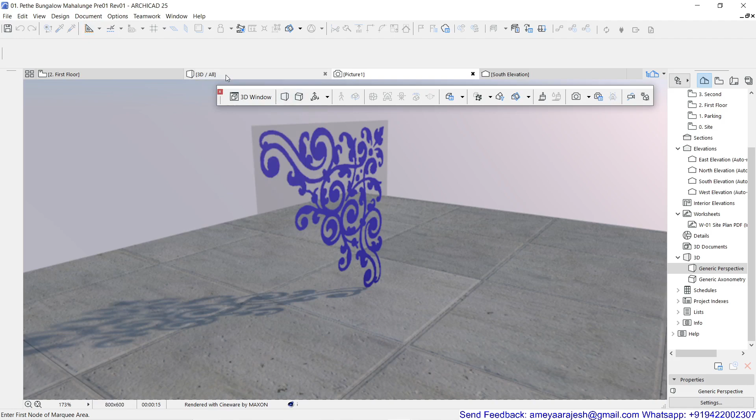For this, I'm having this image with me, so you can take any such image in a black and white format, and then open that in Photoshop. After that, our target is we would like to fill this up with some particular color.

So go inside Select, and you can say Color Range. We are first of all targeting with this picker tool, and we're just going to pick this white color area. By default it will get selected, so all the white area will get selected.

You'll say why not black? It's easier to select white and then invert to black in this image, so I'm doing that. I'll do the inverse for the selection now.

So all the black area is now selected, and then I'm going to add one new layer. I'll switch off the earlier layer, so now this is the current layer. You can select any color as per your choice, use the bucket tool, and try to fill up this area.

Once this is filled, don't deselect the selection area, let it be. Now let's add the alpha channel.

So switch to the Channels tab. Here you can see New Layer and New Channel, and that will become by default alpha. Now here, alpha can only be in black and white normally.

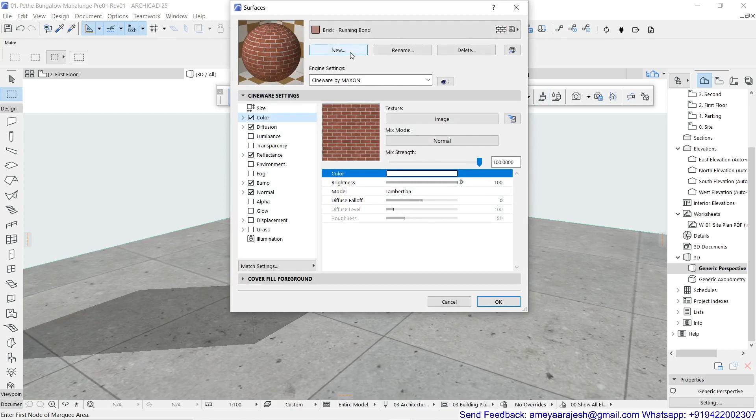Now in ArchiCAD you should start with a surface. You can see New Surface, which I'm going to make a duplicate of any plain surface I've selected. I'll just try to rename this as surface alpha.

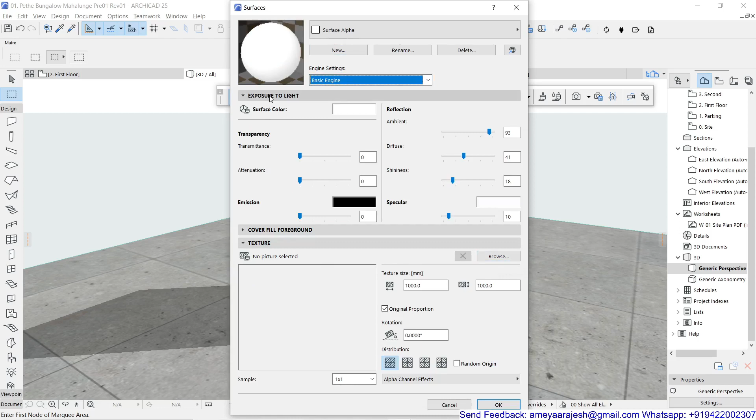Here in the basic engine you have to just go inside the texture rollout, and there you can go for browse, and you can just add that image which you recently developed. So make sure that your image is there now with you.

Say OK. Now you can see the reflection of that selected pattern — check the proportion and everything, you have to match it. Now in the alpha channel effect, you just have to make sure to use the transparency, and just click outside. You will see now the effect is activated for the alpha channel.

A similar setting you should try to apply in the Cineware also. So I'm clicking on Cineware, and here I can see Match Setting, Update Cineware Setting from Basic. Now you can see the correct reflection of this alpha channel along with the main image. Just say OK for this.

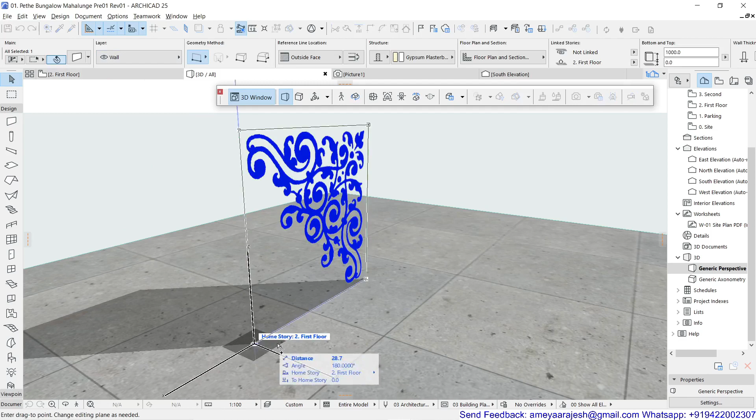The surface is ready. What I have done — this is the wall actually, and this wall I'm just going to copy for you again. Now remember, the wall which I have used is actually with 0 thickness.

You can decide as per your choice, and I have used this as 1 meter by 1 meter. Now when you apply this new surface...

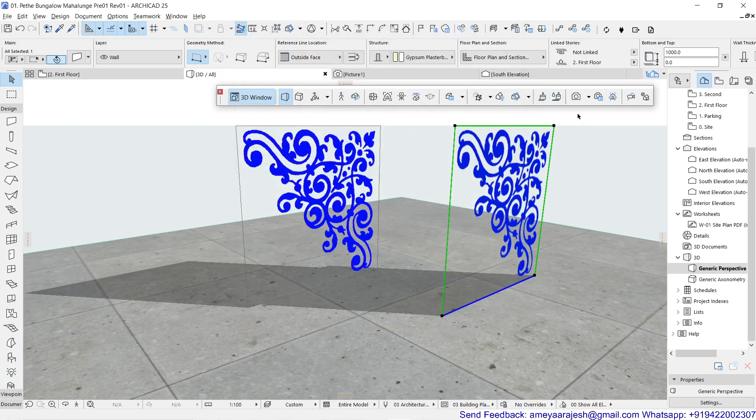So if you just check out this new surface which you have, you can apply it. I'm just going to apply this surface alpha. Okay, this is on both sides.

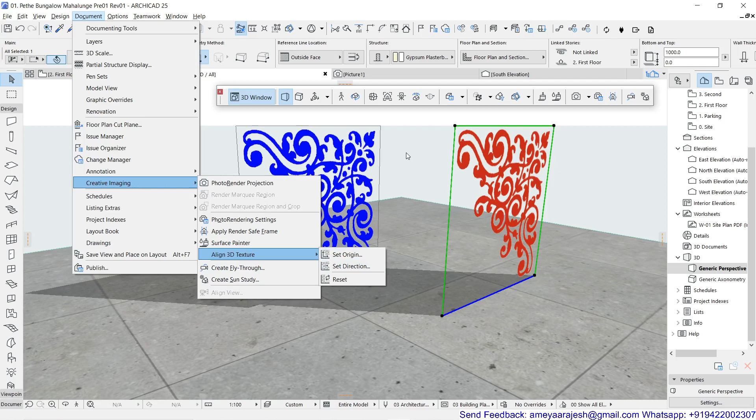Now remember that when you render this, you will get the effect. In case your image is not getting displayed properly on the surface, make sure the surface is selected, and in the document option, go for Creative Imaging and Align 3D Texture, Set Origin or Set Direction. You can use a combination of these until you get the required result on your surface or whatever wall you have selected.

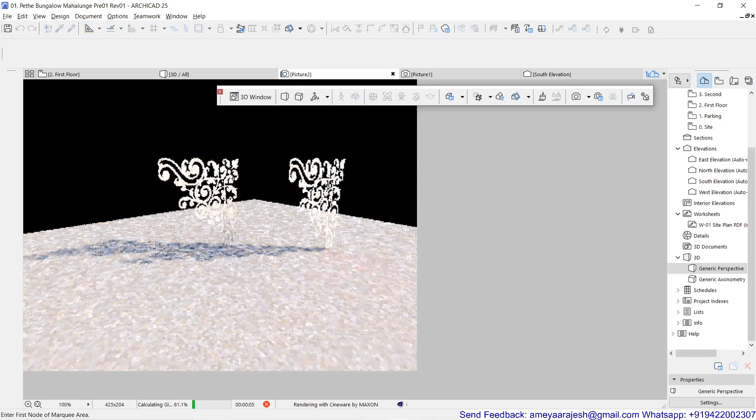So once you get that end product correctly, now you can just go and render this. Of course, if you render this with Twinmotion or Lumion, I think that will be much better. But here we're just trying to render through ArchiCAD, and of course the light and everything will make a lot of difference. So the moment this render is through, you can get the effect of how this is working.

So I hope you can use this and try to solve the problem in your design. Let me know if this is somewhere helpful for you. Thank you.